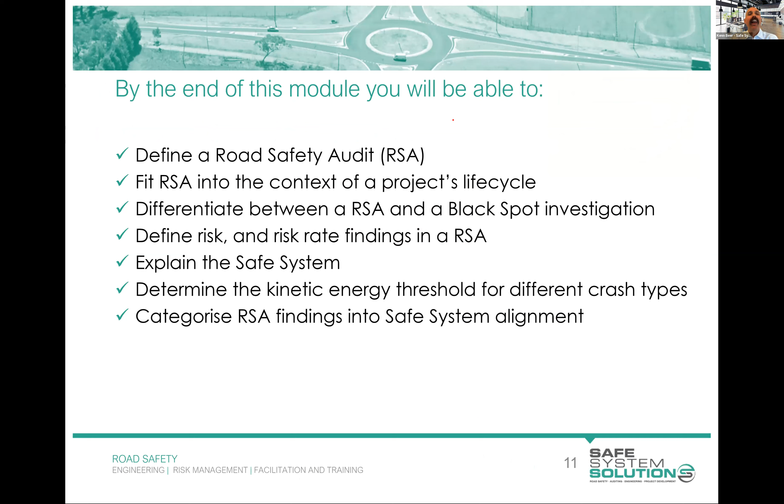We have a lot to cover, so I'm going to jump into it. But the first thing I want to say is that this course follows the Austroads Guide to Road Safety Part 6, Road Safety Audit, that one there. There was a recent release of a new version, the 2022 version, and I was technical advisor to Austroads on that one. We're running through the newest and latest content. Many of you might have seen past versions - they're all superseded, and we're running with that one.

The course overall, for all the different modules here, is about outlining the process. And I stress that this is the process of this thing called road safety audit. All of the technical intricacies that you might need to know as a road safety auditor, we can't cover in the time we have. Really, that is an ongoing learning for your whole career as an auditor or the like - you're continually picking up new things, new ideas. We want you, though, to have a basic skill set as a road safety auditor to understand a few of the common things that pop up in road safety audits and a few principles to think about from what presents risk on the road network.

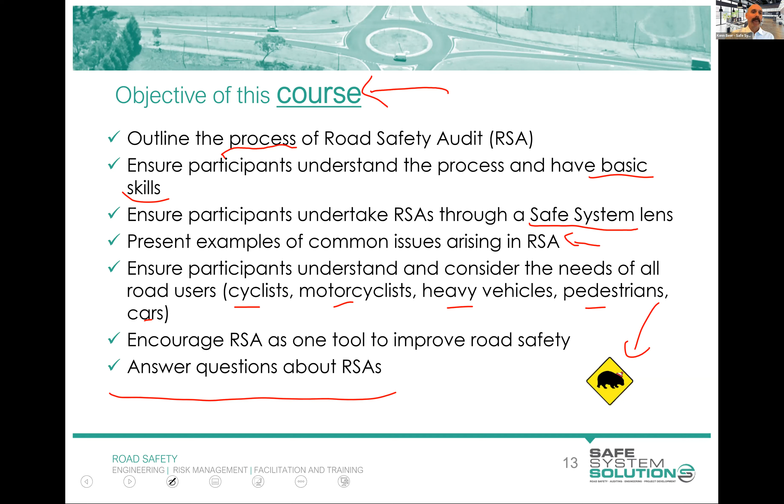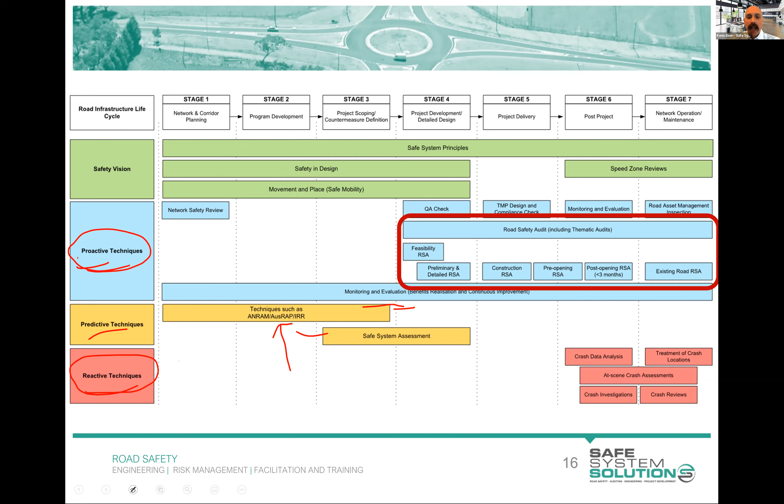But I'm going to keep picking on. I'm going to come straight in here and put up a common road safety audit misunderstanding. And I do that because a lot of people have heard of road safety auditing, okay, but don't necessarily know all the details. So people think that a road safety audit is checking a design or a bit of existing road for its conformance and compliance with the documented standards and guidelines. That is not the case. Okay, that may be part of your road safety audit, but that is not the driver of a road safety audit.

Now, I'm completely sympathetic with people making this mistake because the use of the word audit immediately conjures up that vision, doesn't it? If you're going to get a financial audit, well, they're going to check, have you done everything in accordance with that specific documented law or the like, okay? But road safety audits are different to that. And what road safety audits are is really a common sense check of what is being proposed to be built or what exists that could present death or serious injury.

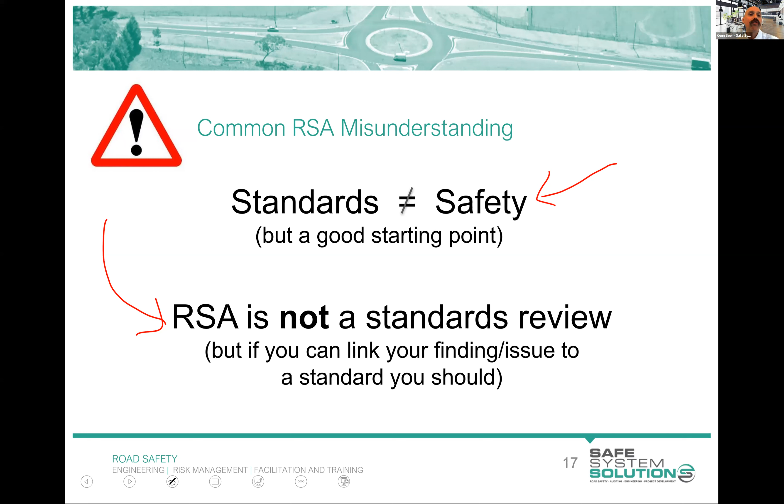It could be because there's inbuilt risk within that standard. It could be the inbuilt risk within that standard that in the context we're putting it is elevated or we believe is unacceptable. It may be that two standards connecting together cause a safety issue. And that's the kind of thing we're looking at. Now, that being said, standards and guidelines that we have documented often are a really great starting point. So we still do look at them and we like to know them as road safety auditors, but checking compliance with standards is not the driver of road safety audits.

In fact, I'll give a prize for the first person to put in the chat which road that is. I'm going to give it to Michael there for Eastern Toll Road. Eastlink is correct. It's very good spotting.

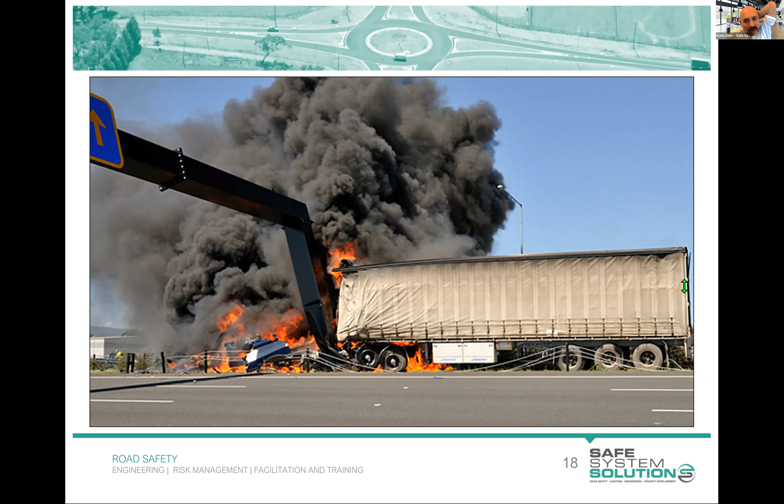Let's say that that's a test level 4 barrier system, the MASH test level 4 barrier system. Now, this is going to start to go above some people's heads, but don't worry about that at this stage. Does anybody know what weight of vehicle that barrier system would have been tested at, 15-degree angle, 90 km/h? Pop that into the chat and we'll see if somebody gets that. So it's a certain weight of vehicle that we would expect that barrier would contain.

I'm seeing some guesses in: 65 tonne, 36 tonne, 16.5 tonne. We're getting a nice range here. Nobody's quite got that. Sean has just got it with the 10 tonne. So under the new MASH system, the Manual for Assessing Safety Hardware, it's a 10 tonne vehicle. Now this vehicle is going to be well over 10 tonne, especially if it's carrying cargo.

So the thing we need to look at there is, at the time, that barrier system and its configuration met all standards. It did. It met all the standards and guidelines and everything we had at the time. And the thing is that we've had somebody die there, even though everything met all of its standards.

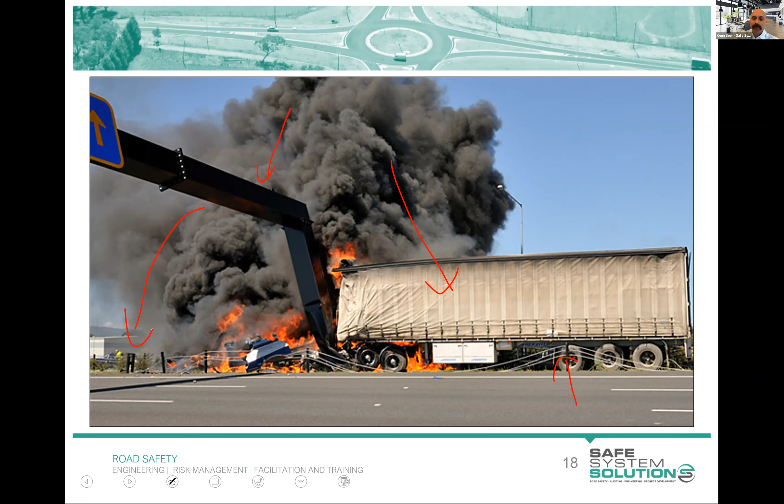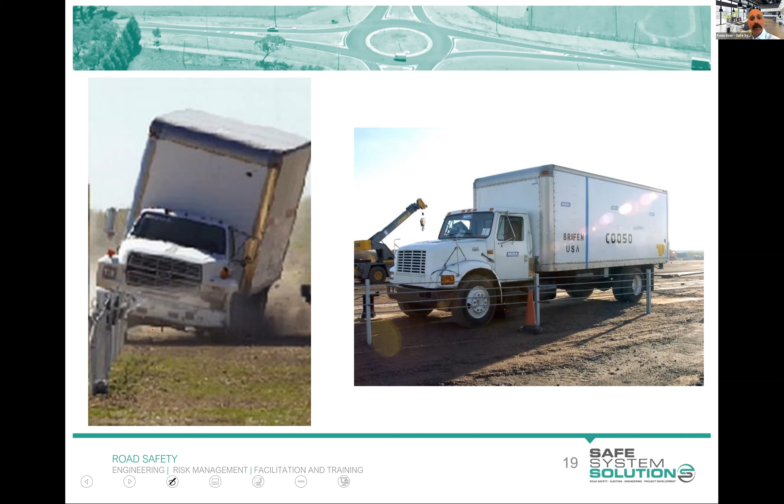So just for interest, that's the test level 4 vehicle, 10 tonne, and that's what we could expect that barrier system to contain in a particular configuration, angle, and the like. But anything bigger than that, we can't be sure it would contain it, and you can see there that it didn't.

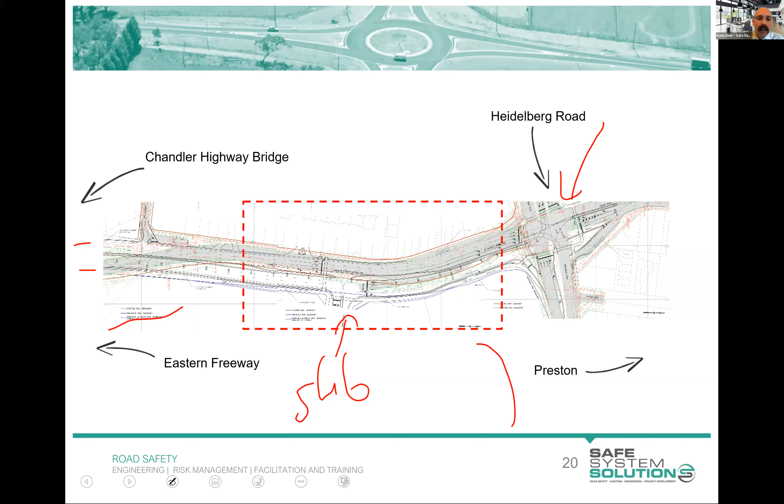Okay, we've got Chandler Highway Bridge down here. A lot of you probably know this area. This is Melbourne, for those not from Melbourne. And what we have is a massive subdivision down here. Huge lot of stuff going on. And then we've got a new access here. So let's zoom in on that access. Okay, and it's being signalized. We can see traffic signals are going there. You can tell by some of the line marking and this sort of highish level design. We can see there we've got a nice right turn lane there. And then I put a little red square as a car there.

Now somebody's driving along in a 60km/h speed zone, and maybe they're going a little bit faster than 60, 65 or something, ticking along, and they're going straight and, oh, we're in a turn lane. Now this is what we would call a trap lane. And to me, it's in there with some of the best naming of road issues we've got, because it is exactly that. You're happily driving along and you want to go straight, and then all of a sudden your lane traps you because it says, no, this is a turn lane now, and you've got to get out of that turn lane.

And we know, and you would logically know, that this area has a significant increase in sideswipe crashes and rear end crashes, because people recognize that and they try to get out, and there's cars braking and all sorts of things. This doesn't technically violate any standards or guidelines. Austroads discourages trap lanes. However, from just a complete look, have we not conformed with any standards? You can't say that that's the case.

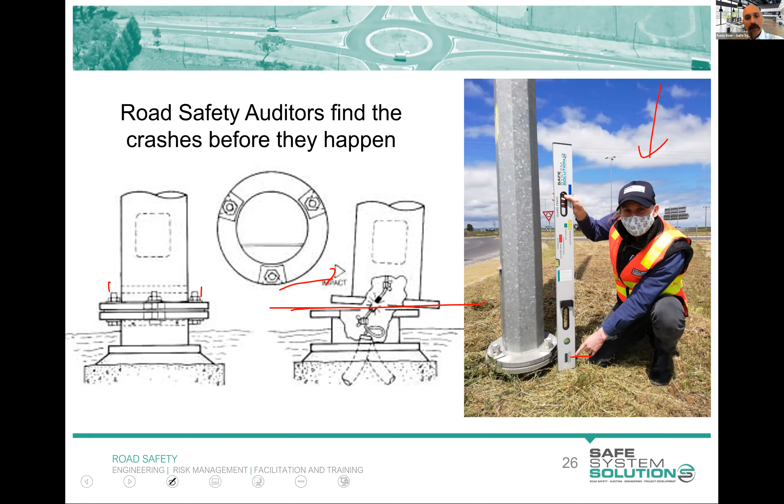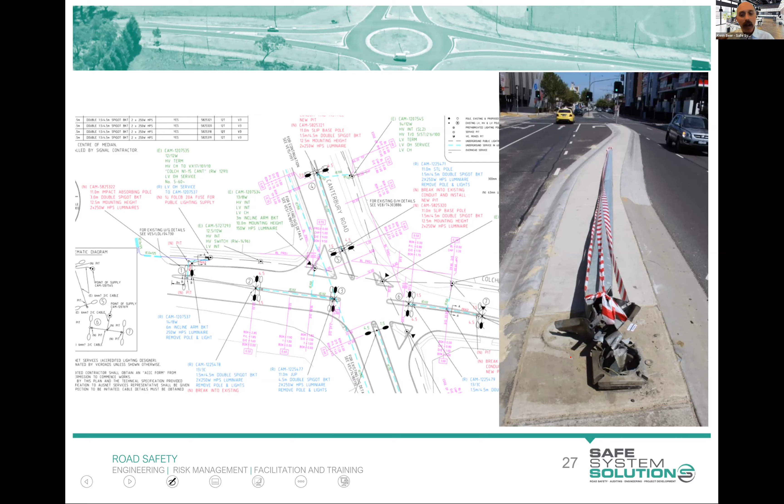Now, what if you looked at the design of this area before they built the upgrades around the Victoria Gardens area, and they'd said, we're going to do that as a slip-based pole because we're all about road safety and ensuring that the occupant of the vehicle doesn't stop abruptly and have all of that energy put into the human body. So they're saying we're going to use a slip-based pole. As a road safety auditor, would you have any thoughts around that? Any concerns? Anything that you might point out?

Okay, this group is great. Lots of good stuff there. I think Tim's going to get our prize there.

First one to sort of pop in there some concerns around where this will fall. Okay, so is it going to fall onto areas where pedestrians are? Now, not too many pedestrians in this photo, but there's a lot of pedestrians in this area often. So we've got to think about that. Is it going to fall onto pedestrians? Is it going to fall onto overhead power lines, onto tram lines and the like? So thinking beyond just that initial impact and how this is all going to happen.

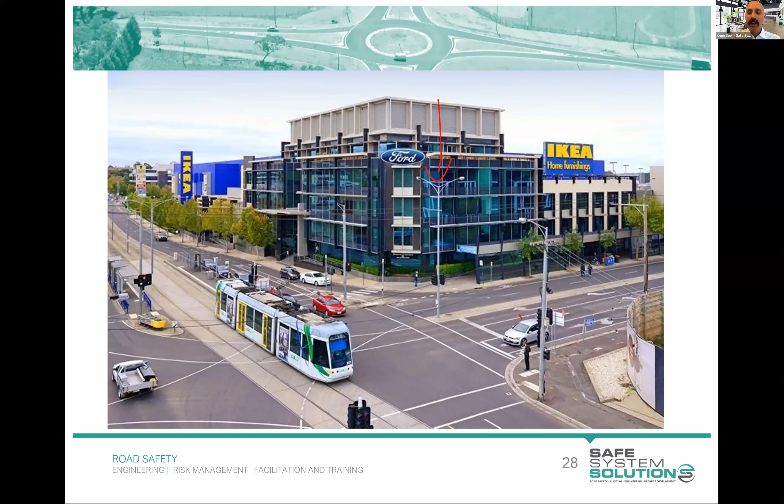Impact absorbing was what we would talk about, an impact absorbing pole. So it's similar principles, except it doesn't shear away. It takes the energy and it envelopes the vehicle within that. So it crushes, but it doesn't shear through. Now, why is this one interesting? Well, you contain the pole in a more enveloped area, so that's an important consideration in that.

But if the vehicle is going at high speed, it doesn't give us that ability for the vehicle to just continue on through. And so what we have is this sort of rule of thumb of high speed environments. You use the slip-base poles where they are going to shear away completely. And in lower speed environments, you either use impact absorbing like this one, if you're concerned about vehicle occupant safety, or you would just use a rigid pole that you know is not going to come down, as long as it's a low speed environment where the energy for the vehicle occupant is going to be low enough that it's not going to kill or seriously injure them.

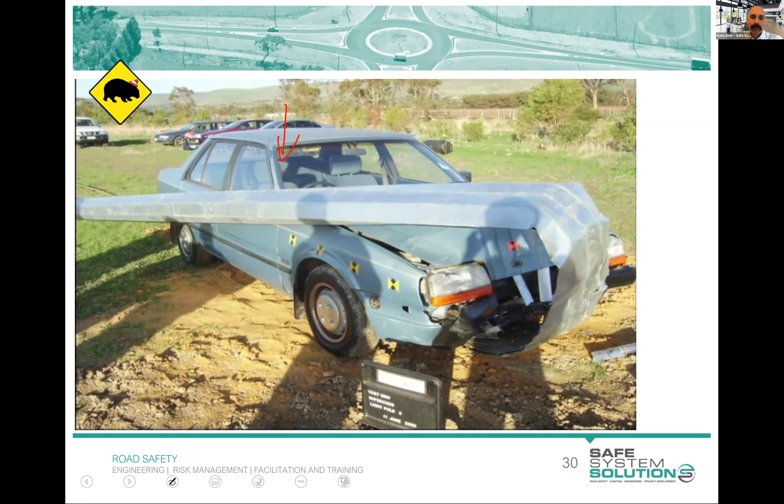And as road safety auditors, we are reviewing plans where they're making decisions about poles and thinking about all of this and weighing it up and deciding whether we believe that presents a risk to the community. So little common findings there in audits that you're concerned about where the slip-base will fall or the height of existing ones.

Now, throughout the slides, and you've got these PDFs in the learning management system, we often put little links to safe system snippets that we've done on this topic with a little bit more information. So when you download the PDFs, you can click on the hyperlink and it'll take you to a little bit more info on this topic. And those will be throughout the course.

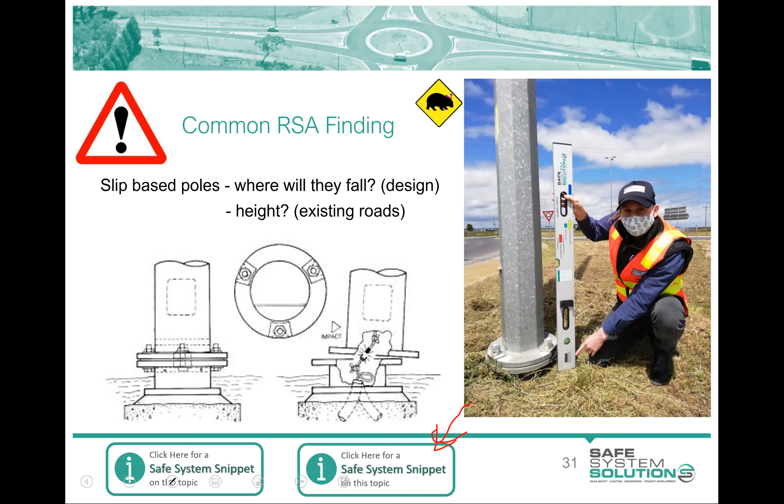Emma, a question that came up around the white ute video that we viewed not long ago, a question from Jamie has come through on the Q&A. What would you suggest to mitigate this see-through effect in this case? I know it's going back a little bit. It's a good question because it sort of leads into some discussion we'll get to around what we recommend as road safety auditors and how we go about recommending things.

Because there are lots of different ways to lessen that risk. And everything from, actually, okay, there is a see-through effect, but there's some very minor things that could be done, including advance warning and different things like that to try to lessen that, so we alert them to it.

There could be modifications to the geometry of the intersection, such as staggering it, where we actually change the alignment of the road slightly so it doesn't look straight down that road. We have the ability to use stockpiles of dirt and the like to block off see-through effects. We may want to move power poles, even very expensive, but in some situations that kind of thing can be

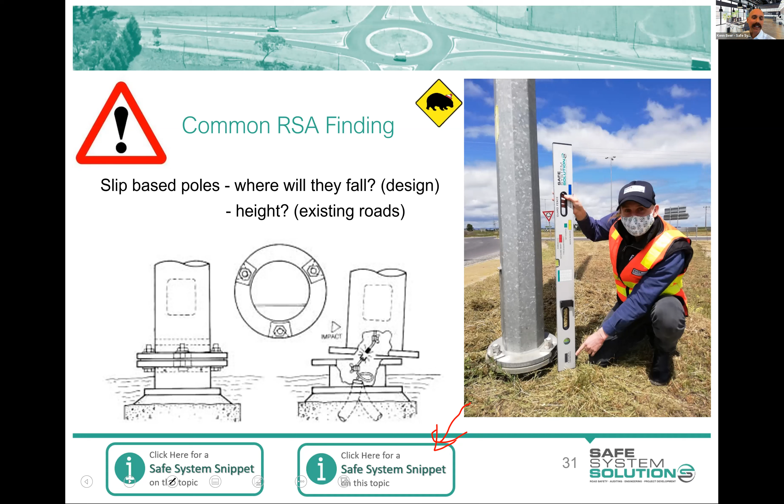done. If you get to these at design stage though, it's a lot easier. It's so much easier when they're lines on a bit of paper or in CAD, and you can start to alter those things. Once it's all built like that, it's existing, it's very expensive and hard to alter them.

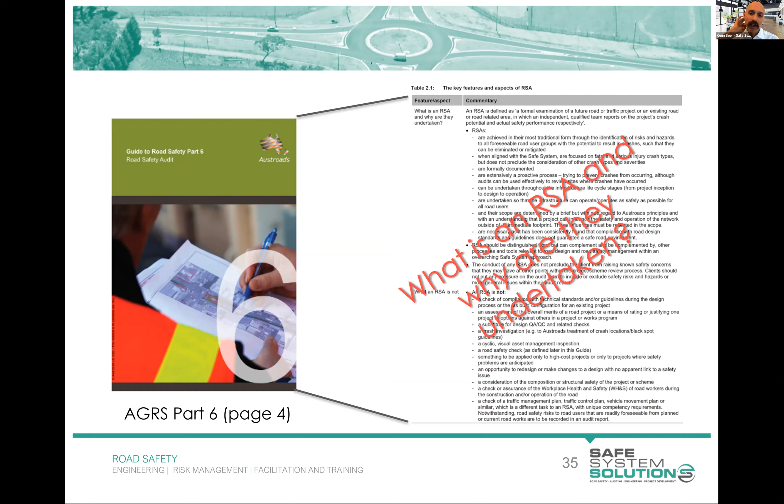But I do want to extract this little bit and mention it. Road safety audit is a formal examination of a future road or traffic project or an existing road or road-related area in which an independent qualified team reports on the project's crash potential and actual safety performance respectively.

Very important words in here. Road safety audits are a formal exercise, okay? It's not a quick check, not something you whip up at lunchtime. No, you go through 10 distinct steps now, okay? And that's a formal process.

By future roads, we're talking about designs for upgrades or new bus interchanges or anything that interacts with the road or road-related area. It can also be existing roads, so you can audit existing conditions. What's out there?

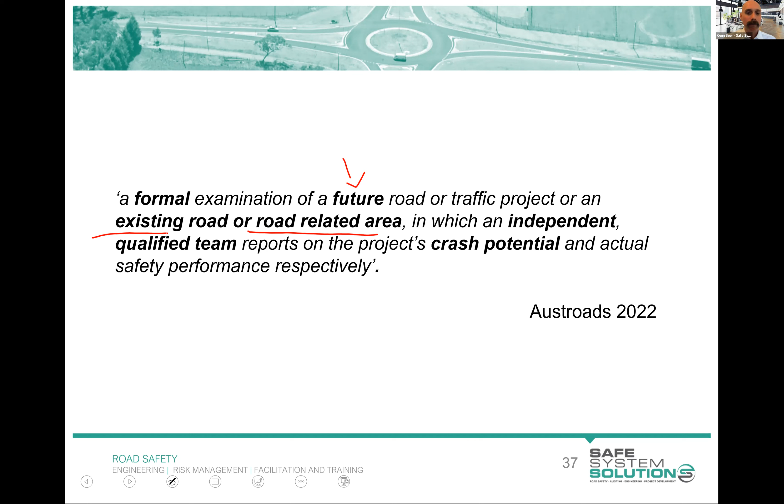Independent, super important, okay? You cannot undertake a road safety audit of your own design. You cannot undertake a road safety audit of a project that you're project manager of, okay? You must be independent of this.

Qualified teams. I will talk to you in our final module about what qualifies someone as a road safety auditor, the accreditation, registration across Australia, and who can do what. But we do need qualified teams. It's not just randomly picking people.

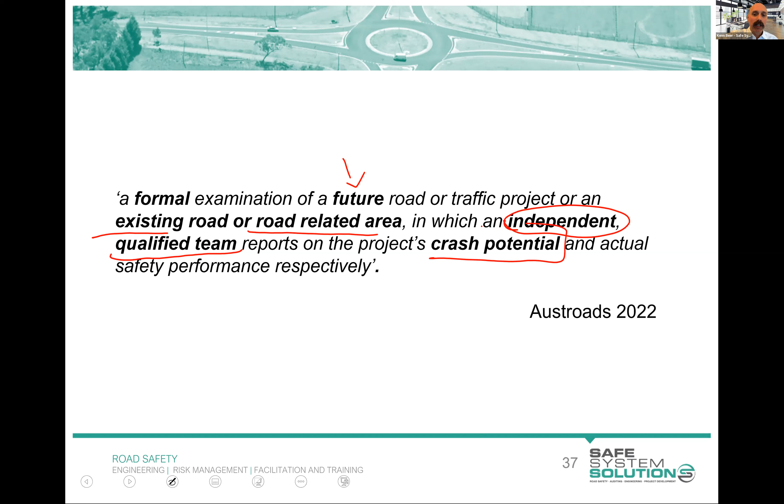And reporting on the project's crash potential. It's all about, what is the potential for crash?

So we operate under this thing called the SAFE system. Some of you have heard this a thousand times already, but I have to go through it once more for those who may not have seen it.

We need to ensure we are now undertaking road safety audits through this SAFE system lens. Now, the SAFE system, I could talk for many days, many years on it, but it has some key elements we need to think about as road safety auditors. It might be a little hard for you to see, but there's a principle in the middle of this SAFE system diagram. I picked this one out of the many I could have picked.

Human bodies are vulnerable. There's only a certain amount of force we can handle before we break. And we'll get into analysing that.

People make mistakes. So people make mistakes is a fundamental principle of the SAFE system. It says that people are going to make mistakes out there. We're going to do everything we can to lessen the amount of mistakes that are made, but we need to get our head in the space of trying to design the system to manage those mistakes. I talk about minimize mistakes, but manage mistakes. And what I mean by manage mistakes is try to think about the energy and the severity of the crashes.

So when we're auditing, we're thinking about trying to stop the crashes happening, absolutely. But then when they do happen, how do we make sure they're not so severe? And that links into our shared responsibility. We talked about that with the white ute, didn't we? Yes, there's some inappropriate things happening there, but that doesn't mean we can wash our hands as people responsible for the road, or designing the road, or making operational change. We can't do that. No, absolutely not. We take a responsibility there.

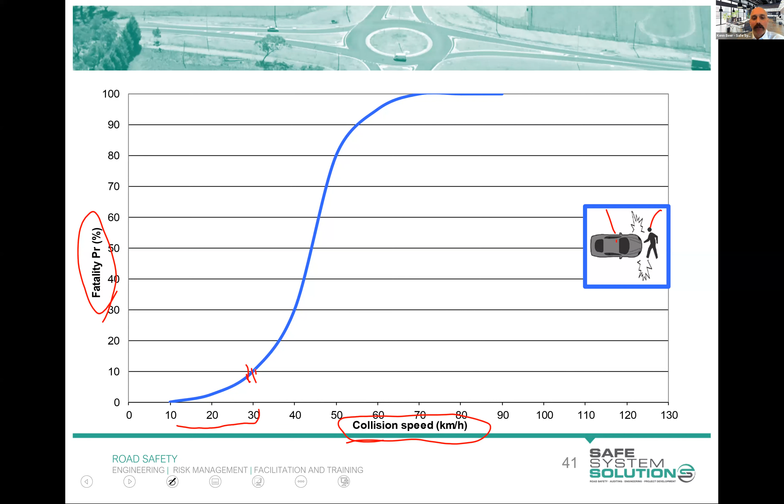So we actually have this information for different crash types within the population - we've got the chance that an incident will result in death at certain collision speeds. Now these are collision speeds, not speed limits. We see here for car hitting pedestrian, we're talking around 10, 20, 30 kilometers per hour is where it really starts to go really bad, really quick. That's a sort of exponential kick-up point.

There's the great man himself - comes in a little bit higher because this is a graph and a line for the population. We're going to have Usain Bolt-like people, we're going to also have our grandparents who are going to be much more frail and less able to withstand force, and then we're going to have weird, crazy incidents up here where people miraculously survive. But that's the general curve.

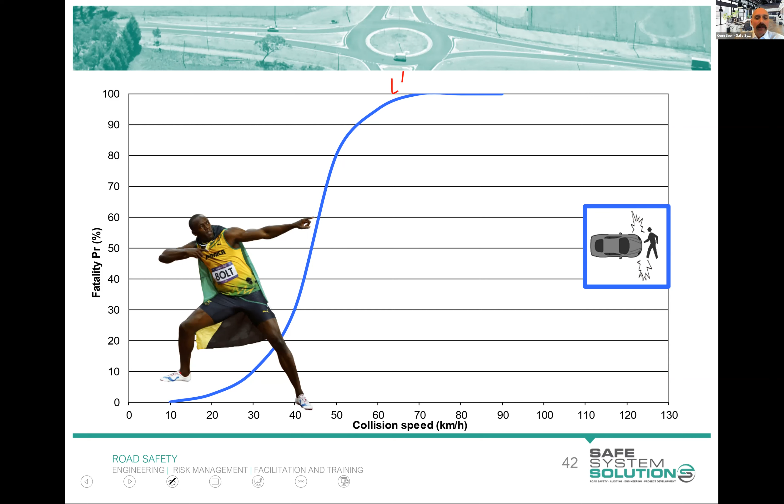This is what we're designed to withstand. He's okay - he broke a few ribs, came back, won the gold medal the next year. That's what we're designed for.

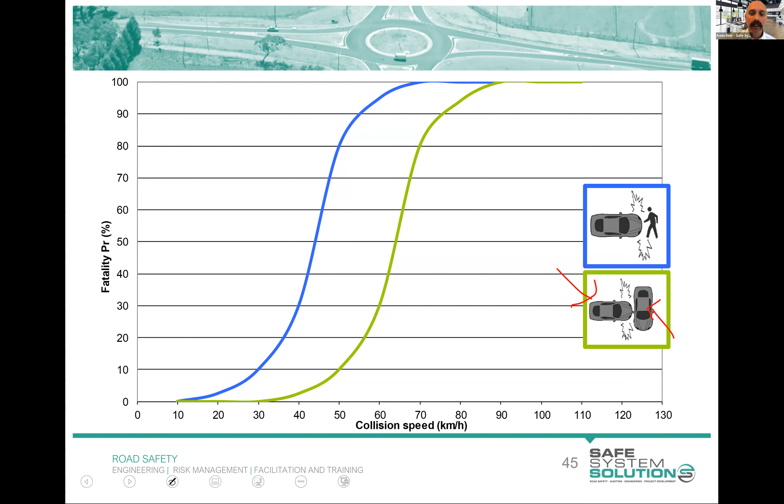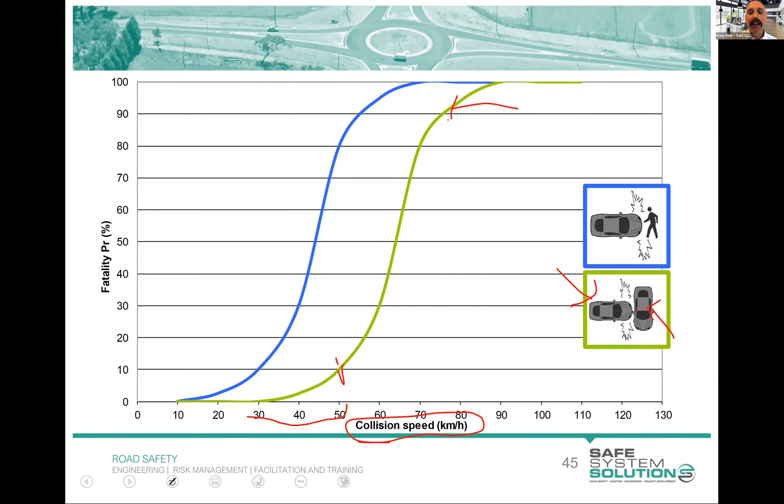But what about some other crash types? Okay, well what about a right angle crash? This is what we call the bullet vehicle, the one that does the damage, and this is the target vehicle. So bullet vehicle speed is what we're talking about when we say collision speed. We see bullet vehicle speed of 30, 40, or even around 50 kilometers per hour, direct right angle side impact into that vehicle - there's a decent chance of survival. Up around 80, 90, 100, there's not a good chance of survival for the occupant of the target vehicle being struck by a bullet vehicle at that speed.

Okay, so closing speed would be double that. The actual energy impact is the equivalent of that speed running into a brick wall - same speed, same mass, direct head-on crash, same as running into a brick wall at that speed, in terms of the force on the driver or passenger of each vehicle. If you were standing in the middle of it and got crushed, you'd double that. Or if it was like a little mini smart car and a massive B-double, and it came in and then went back, then you're doubling your energy.

But from that perspective, there's a Mythbusters episode that covers all that, if you want, in wonderful Mythbusters fashion, crashing cars into walls and into each other to actually prove that point. We've got some snippets down there.

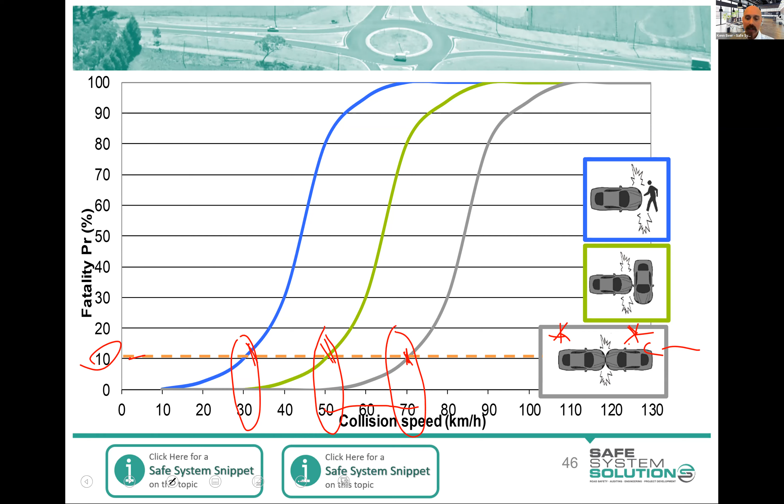But we sort of draw this line around this 10% level where things start to kick up exponentially, and those become really important speeds at different crash types, or crash types at different speeds. So we need to think about 30 kilometers an hour for pedestrians and cyclists, 50 kilometers per hour for side impact, 70 kilometers per hour for these head-on crashes, and think about a crash we're predicting - will it be above or below that? That becomes an important consideration. I've put some more crashes and these impact speed thresholds in there, and you need this sort of general consideration of severity.

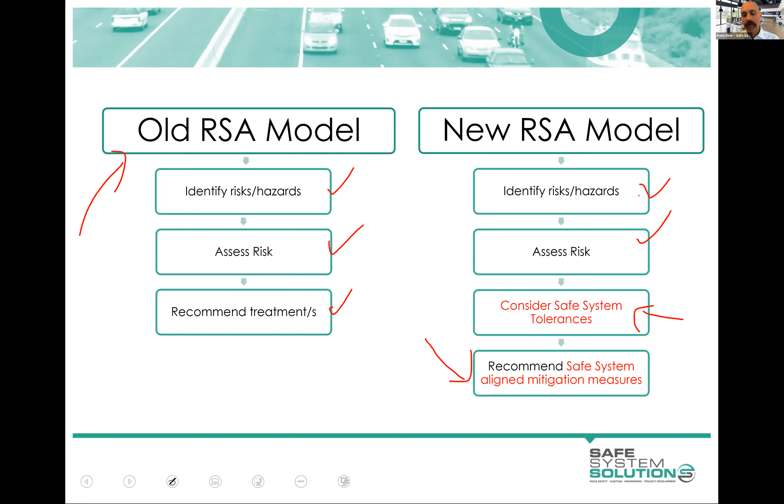I'm going to jump through this a bit quicker because I can cover that off in more detail later. The old road safety audit model used to be for us to just identify a hazard, do a risk assessment on that hazard, and recommend a treatment. We still do all of that, but now we identify the hazard, risk assess it, then think about that tolerance to the human body and those threshold speeds we just talked about. Then we make recommendations still, but we categorize those recommendations into how good they are in terms of safe system alignment.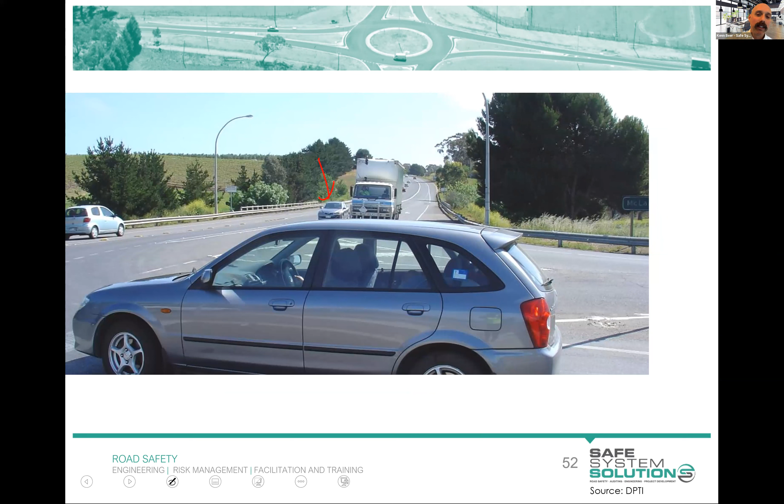Okay, this car's waiting to go. It's looking up the road. It can see that truck there, it can see the white car just next to it. It comes along and goes, oh beauty, I've got a nice clear run - as soon as that truck's turning left, as soon as that white car's continued past, I'm going to make my right turn. And then that silver car appears - the whole time it had just been hidden behind the truck. So people would call that masking, or officially dynamic visual obstruction. This is a dynamic visual obstruction because it's moving, it's not always there. And we see that just the configuration of that left turn lane has increased the chance that this will happen.

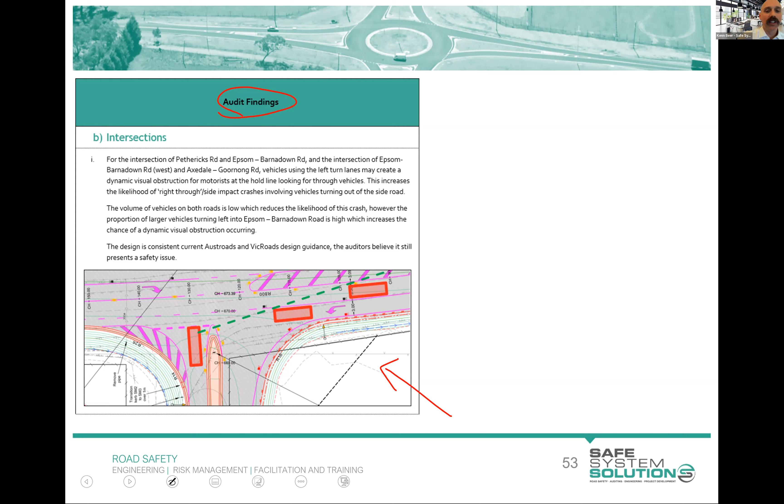Without even reading any of this, we know what the issue is. And I really encourage you to do that as road safety auditors. A snip of the design, if you can annotate it and really make it clear, because immediately we know where they're talking about, we know what the issue is, and it's very clear and helpful.

But in the words, we have a number of different things. And in my many years of auditing and teaching road safety auditing, I finally, probably about 5 or so years ago, came to the realization that I can actually make a formula of how to write a good road safety audit finding, or a recipe, as some people have now decided I should call it. But I'll break this down to some key elements to try to make it easier. And when you are writing road safety audit findings, we're going to be marking you on this. So make sure you include these elements.

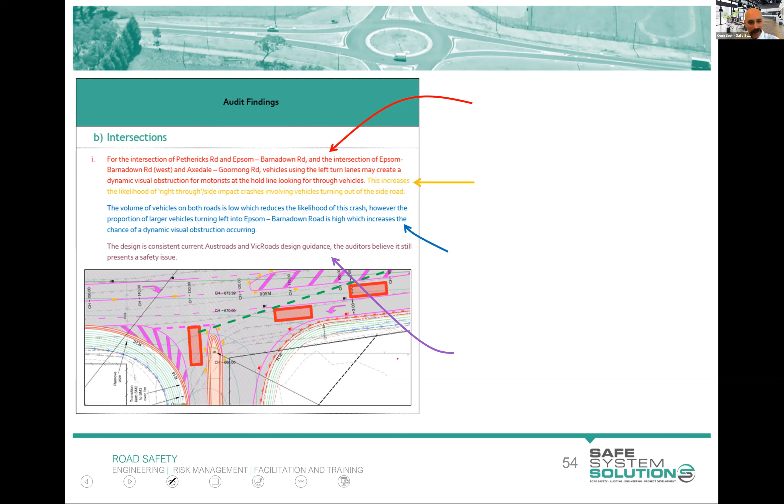The red there is the issue. For the intersection here, vehicles using the left turn lane may create a dynamic visual obstruction for motorists at the hold line looking for through vehicles. Okay, it's explained. The yellow says what crash is going to happen. This increases the likelihood of right through / side impact crashes involving vehicles turning out of the side road.

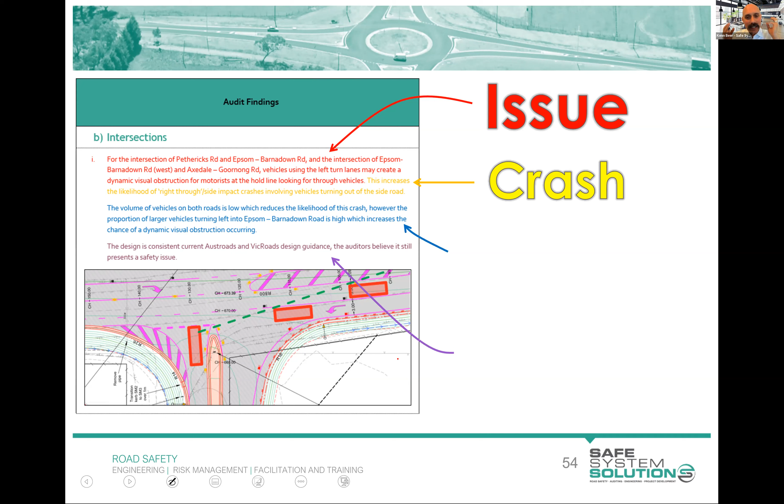Clearly stated a crash. Now, that's important to go in a road safety audit finding, because if you can't actually say a crash that's going to happen, it's not a road safety audit issue. Because this is about stopping crashes or preventing the injury within crashes. The blue then elaborates on any factors that are altering the risk there. So the volume of vehicles on the road is low, which reduces the likelihood of the crash. However, the proportion of large vehicles turning left into Epsom – Barnadown Road is high, which increases the chance of dynamic visual obstruction occurring. Okay, so it's dot pointing some things in there.

And then this final one says the design is consistent with current Austroads and VicRoads design guidance. The auditors believe it still presents a safety issue. So in this one, the auditors have said, hey, this technically meets standards. We still think it's an issue, and put it out there. Now, you don't need to put this purple bit. If it's something that clearly doesn't meet standards or guidelines, you'd certainly put that in because it's extra justification on why this is an issue. If it does meet standard guidelines and you're still worried about it, you may like to put a statement like that. You don't have to, but those are the elements.

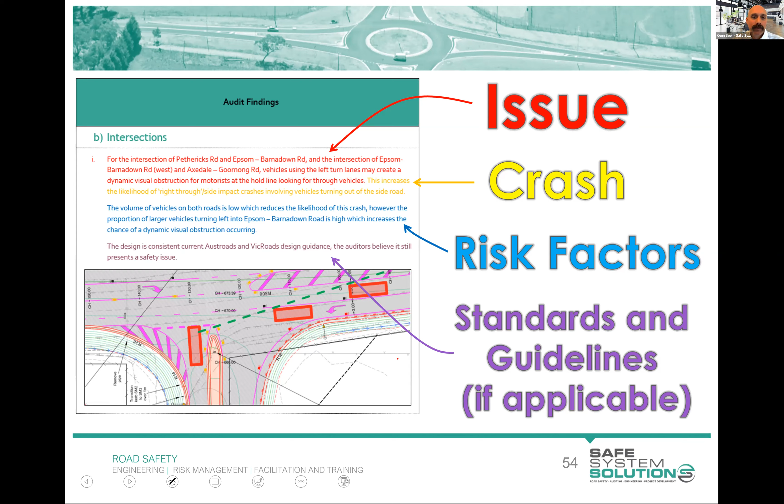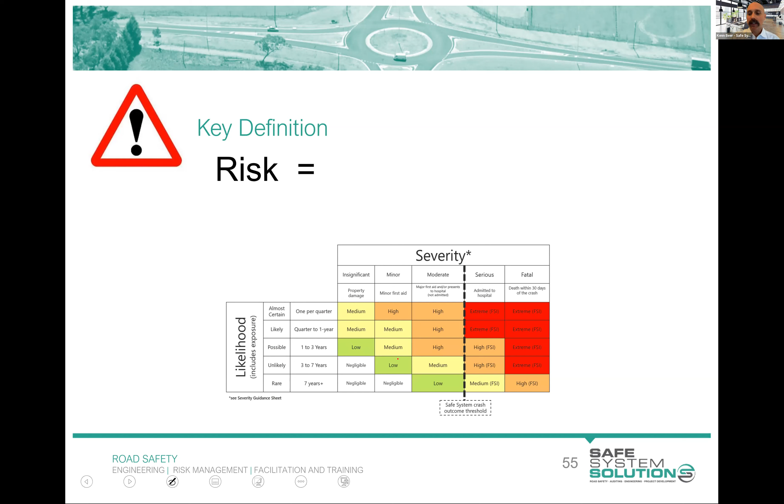Then you risk rate this. So we've clearly laid out this issue and we risk rate it. Now, risk equals likelihood times severity, or frequency times consequence. This is the international definition of risk. This is like financial risk, health risk, any type of risk. It's like, what is the chance of a bad thing happening? And then when it happens, what's the magnitude of badness? What's the severity of it?

And so, what's the risk of recession? Well, what's the chance we go into recession? And then how bad is this recession going to be when we go in? That's the risk of recession. What is the risk of a crash? Well, what's the chance that this crash happens? And then how bad is that going to be? And we do this then for each of the issues that we identify.

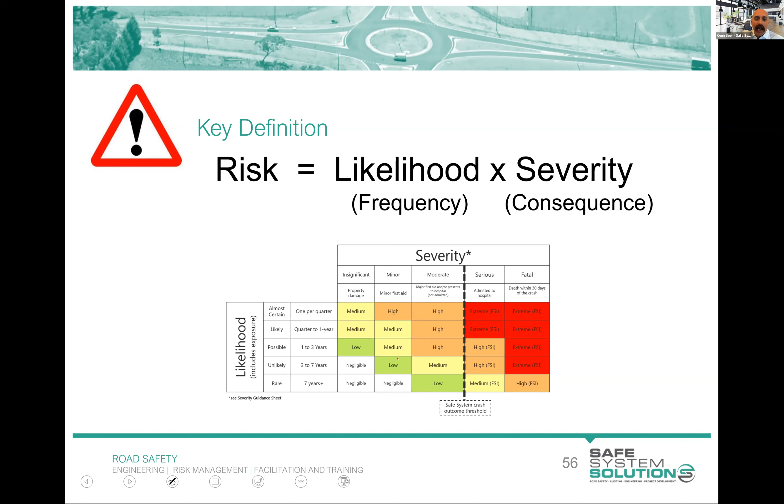Now, when I was coming up with this in the newest Austroads release, I spent a lot of time trying to think, how do we make this as useful and clear as possible? I came up with this diagram, working with the others. What we've got here is likelihood. This is the actual risk matrix now in Austroads, and it's the new one. So use this one. So this is the chance that the crash happens.

Now, any of you that do safe system assessments, you'll know exposure is another thing, with exposure within likelihood in road safety. We've got almost certain, likely, possible, unlikely, rare. But what does that actually mean? Well, we've given you some time frames where you'd expect those crashes. So as a result of that dynamic visual obstruction that we were looking at, if you believe that that is going to cause a crash every quarter, you would say almost certain. If you say, well, it's an issue, but it's really not going to happen, maybe once every 10 years or something, then you're saying it's rare.

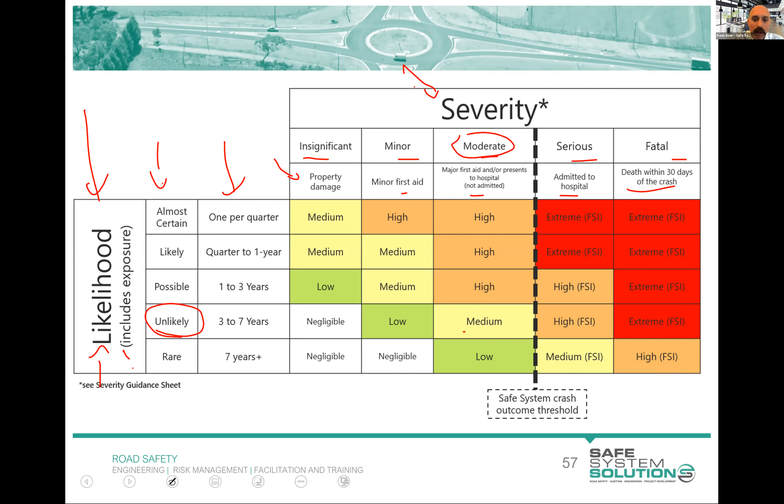Okay, but then when the crash happens, what's the severity of it? Insignificant, minor, serious, fatal, moderate? And what we've done is we've put in some information around property damage, minor first aid, major first aid, admitted to hospital, death within 30 days of the crash, to one occupant of the vehicle or one person involved in the crash. So to get to your risk, you say, all right, well, I think it's going to be unlikely and moderate. Well, that's a medium risk.

But what's this line here? What's this dotted line here? Well, under the safe system, we're trying to get rid of fatal and serious crashes. That's our aspiration. We know that we're still going to have mistakes and minor things happen on the road network. We don't want them, but anything to the right of the line we're very concerned about. Anything to the left of the line we're just concerned about. So you'll see that you've got high with an FSI and you've got high without the FSI. So that dotted line is there.

So if we go back to this, then we might say for this one, we think it's rare, because we said low volume, just low chance that it's going to happen. We think it's going to be serious when it does happen. The resulting risk is medium, and it's FSI because it's within that serious category. And then, so we've established now the issue, we've established a risk rating for it, and now we want to make some recommendations.

And we want to categorize these recommendations into either a primary safe system recommendation or a supporting safe system recommendation. A primary recommendation actually doesn't mean your number one recommendation, as the wording would imply, because you might have many primaries, because it's about how well they align with safe system principles. And you'll see here, road planning, design and management considerations that virtually eliminate the potential for fatal and serious injury crashes occurring associated with a foreseeable crash type. Supporting are anything that improves the overall level of safety associated with a foreseeable crash type, but are not expected to virtually eliminate the potential for fatal and serious injury crashes occurring. And then this little other bit: doesn't change the ability for us to put a primary treatment in the future.

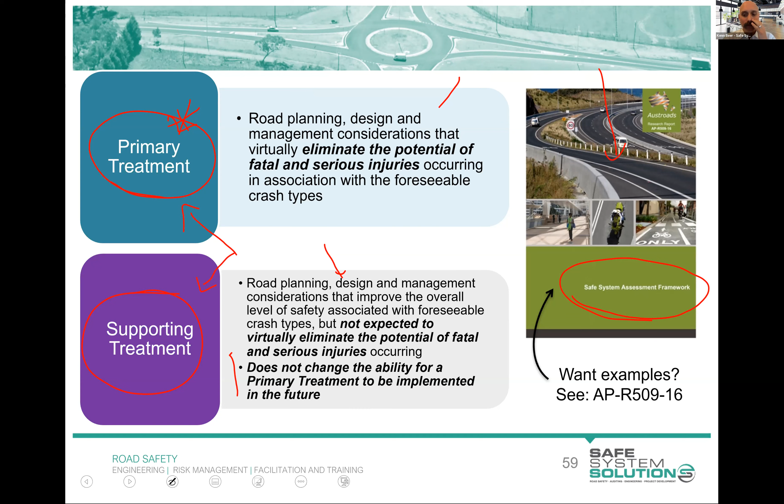And I'll come to questions in a second. I just want to get past this final bit and then we'll answer those.

So you then make a recommendation or recommendations as road safety auditors. This one says, implement measures to reduce the speed and/or angle of impact at this location. This could be achieved with a roundabout, P, primary. If this cannot be achieved, implement measures to improve sight lines at this location, such as increasing the offset of the left turn lane, relocating the hold line forward, provided that it can be done safely. Supporting.

Okay. So on this, you can just have one recommendation, but sometimes that can cause a little bit of an issue. For example, this one, we'd love a roundabout here, okay? And maybe it's at an early stage in the project enough that they're still thinking about options and, oh, should we go for this? Should we go for that? And that may help. But maybe they're so far progressed in this job that they're locked in with the budget and the specifics of it are so locked in that the roundabout is a ridiculous idea to whoever's receiving this, in the sense that they just go, we can't do that, right? Well, what else can be done to lessen the risk? And so we've given some other options there. And that's, to me, being realistic as an auditor.

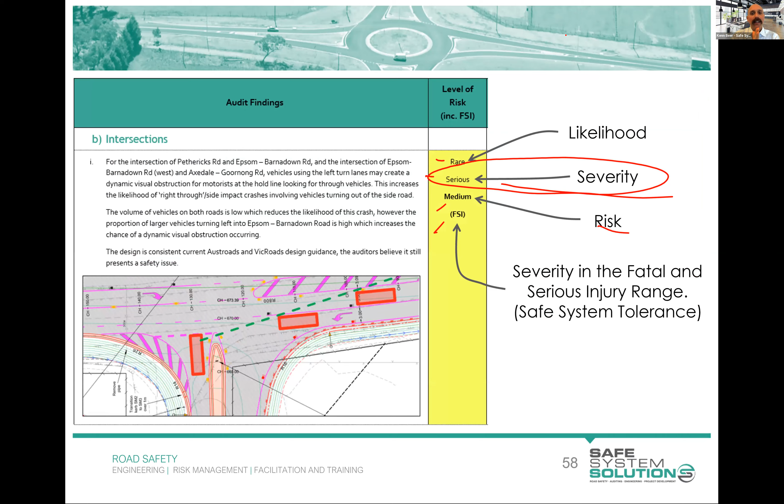FSI is fatal and serious injury. Sorry, I should have said that. FSI is fatal and serious injury, and it was to the right of the dotted line in our risk matrix. That covers off the fatal and serious injury there. Oh, looks like people are already helping out. Yeah, it's great to see everyone helping each other out.

And one question at the bottom is, if presenting options, would it help to provide the level of risk for various options? That's sort of next level thinking, because we've just finished a project for the Asian Development Bank, working in collaboration with iRAP in doing exactly that with star rating and risk rating of different options within road safety audits, called star rating for road safety audit. Not something we're going to include in this course.

The way it happens in practice usually, though, is that we will present these and then have discussions with the client. And it's a bit more collaborative at that end of the audit. But if you can articulate quite clearly in your recommendations which is the better risk reduction and which is the lesser risk reduction, that's very helpful.

And what may also happen is that the client, whoever receives this audit, may ask you for particular advice or to provide some commentary around which is best and what sort of reductions you might be expecting. And that might be something that you could provide an extra memo on. But happy to show people the way you could do it in a more formalized manner. It's not something that's done in Australia yet, but I think it could be a really valuable approach.

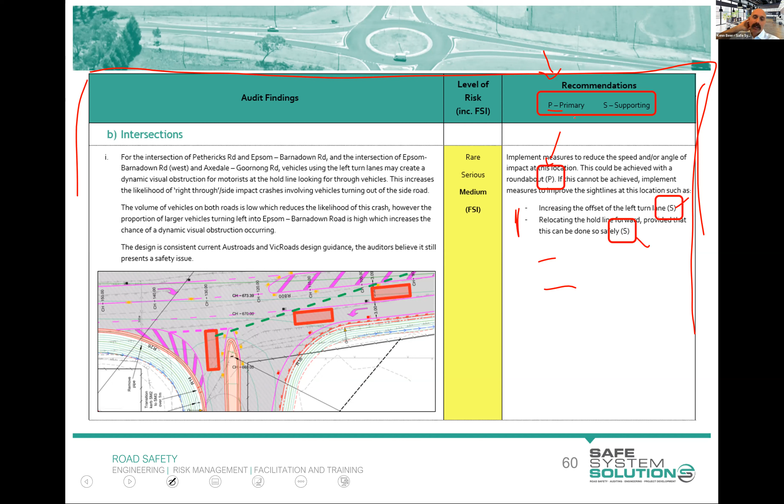I better keep moving on, Emma, to give you a bit of time to introduce the exercise. I just happened to be having a chat with Jamie, and Bob and Jamie were talking about something, and I thought, I talk about that in the road safety audit course, I should put a little diagram of that. A similar issue came up on a design, and even within the road safety audit, we went a little bit above and beyond what you'd usually do and sketched up how it could look by utilizing a bike lane to open up the sight lines there.

And that actually helped in multiple concerns we had in the design, because one was that dynamic visual obstruction, but another was the number of bike riders we saw while we were out there as an audit team, which was a little bit more surprising to us. And they were not really going to have any separation going through that intersection. So the bike lane opens up sight lines for a vehicle that's stopped here, and also gives the riders a bit of space between the left-turning vehicle and the straight vehicle.

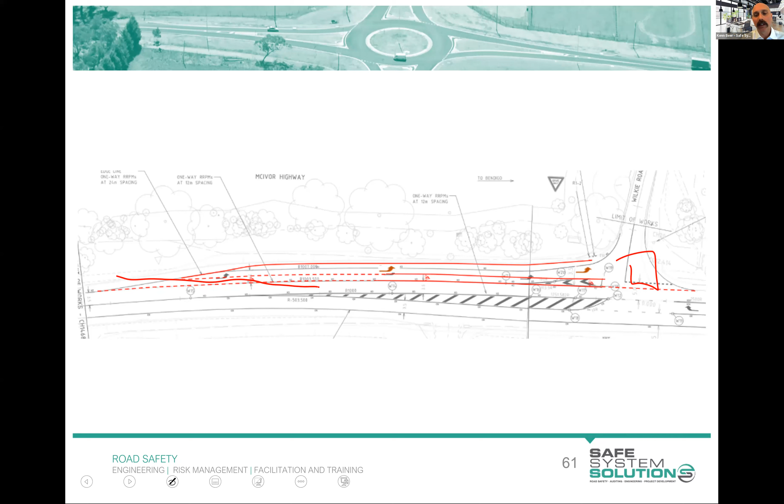Little tip there. So to be a primary safe system treatment, it's really going to have to address the consequences of the crash, the severity, or it's going to have to virtually eliminate the possibility of the crash happening, which has to take into account human error. So people falling asleep or running a red light or these sorts of things. So you'll get some practice at working on what's primary and what's supporting, and have a look at that Austroads Safe System Assessment document, which we've put into your resources.

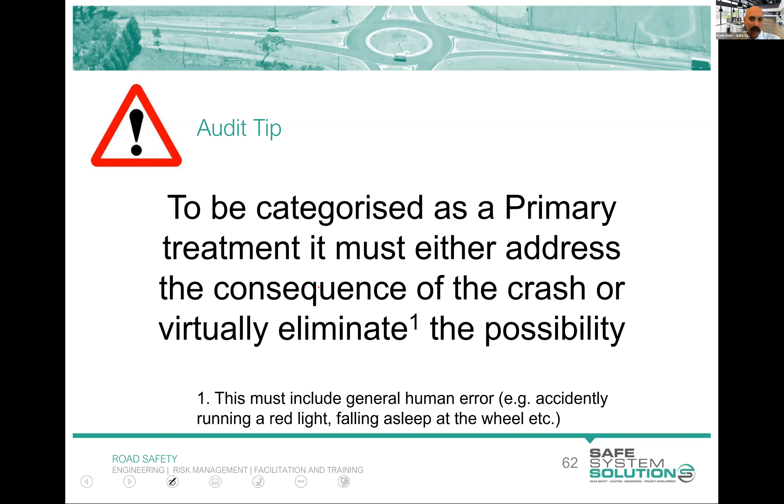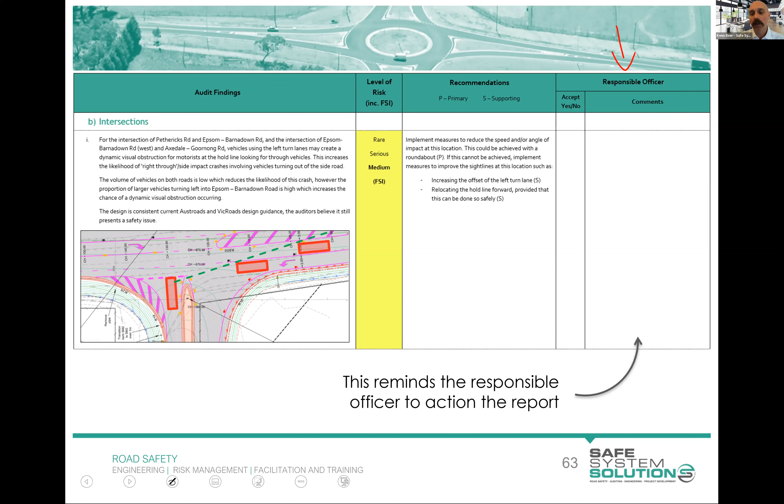Last thing I want to say is in the full table that you provide, this area you leave blank, and responsible officer, which is whoever gets the report, and it is just a reminder: hey, do something with this, right? Respond to it. You don't need to accept what we're saying. Just make a comment as to, yep, I accept that, going to do something about that. Or no, we disagree completely for these reasons. That's all fine. But we as auditors, we leave a blank column there.

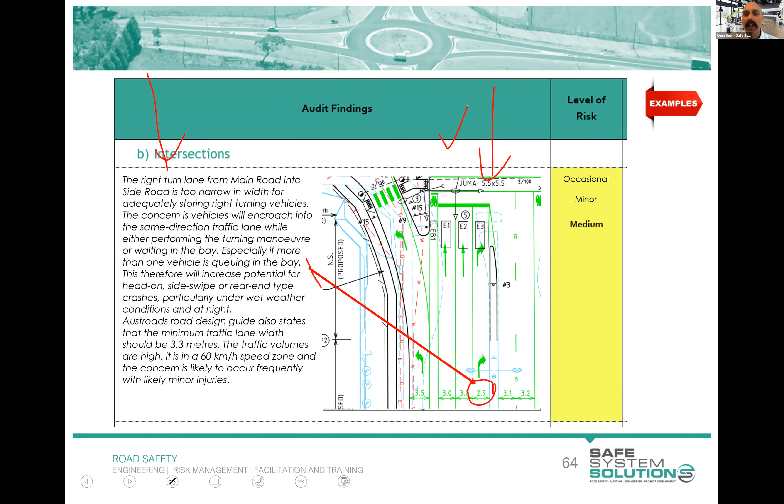Fair enough. Okay, so we don't even need to read all this because this has done a beautiful job, but there's lots of good stuff in there. You can see the risk ratings in there. And then thinking about the tolerance to physical force. And sorry, I'm jumping through quickly here. The 2.9 meter wide lane... hurrying through to catch up on a little bit of time here.

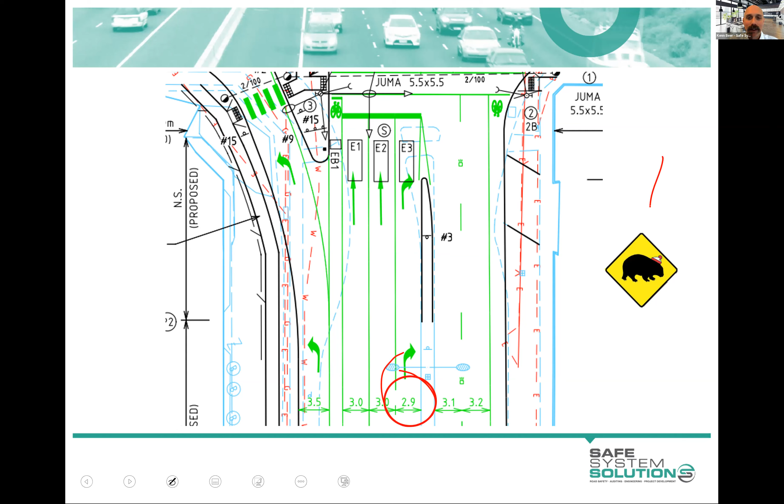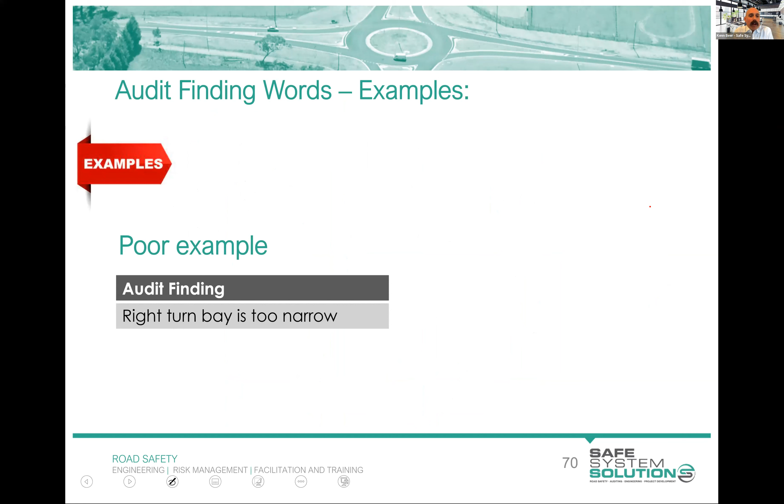So in terms of wording these, go back to that formula, because a poor example of an audit finding, the wording, would be to say something like, right turn bay is too narrow, without a snip or anything like that. I mean, I get that. I'd go, which right turn bay? And what's the issue? There's so many questions to ask there. What would be better is, right turn bay from main road to side road. It increases the chance of sideswipe or rear end crashes, and Austroads wants a 3.3 meter minimum. So we've got some more flesh on the bone there.

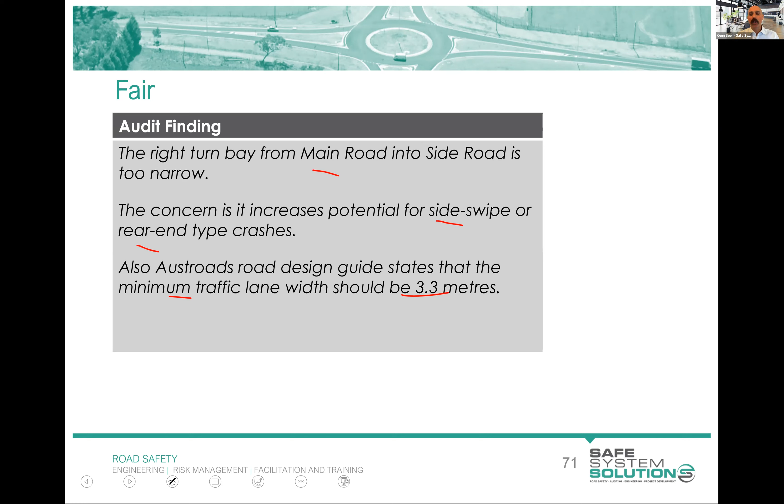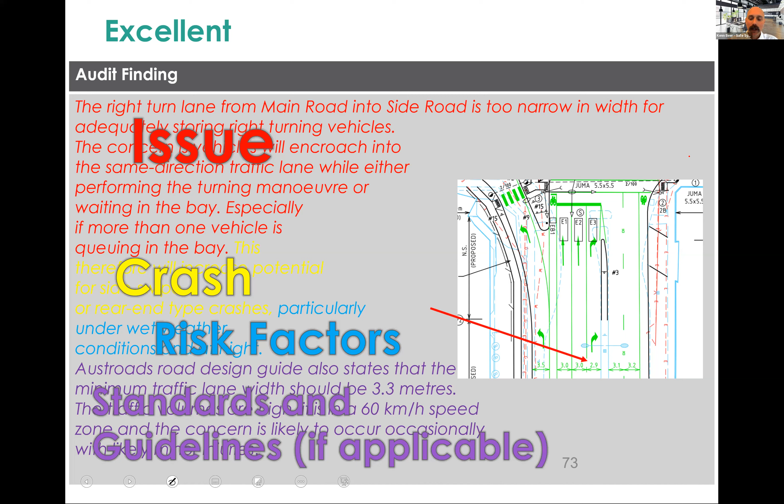But the gold standard here has the snip, so we know what's going on. And it's got all of these words, which we could then break down into their specific elements, which is the issue, the crash that could happen, the risk factors, and standards and guidelines, if applicable. So try and get back to that formula.

Okay. Road safety audits. Here's just a few things that they are not. Not a check of compliance with standards. It's also not an assessment of the overall merits of a project. That becomes quite important. You're just there to identify issues with that project. That can be a hampering element of a road safety audit, that it is just pointing out issues. It's not saying this is a wonderful road safety project that's going to save many lives. No, what it's saying is that we're concerned with this specific aspect of it. So it doesn't quite do that.

Safe system assessments, on the other hand, are a wonderful tool for showing the value of a project. A road safety audit is a different exercise, not a means for justifying one project option against another. We don't use road safety audits to rank project options. It's not a substitute for a quality assurance process. It's not a crash investigation, and it's not the usual sort of asset check, visual inspection. And there's a number of other things in there. I'm not going to read through all of that.

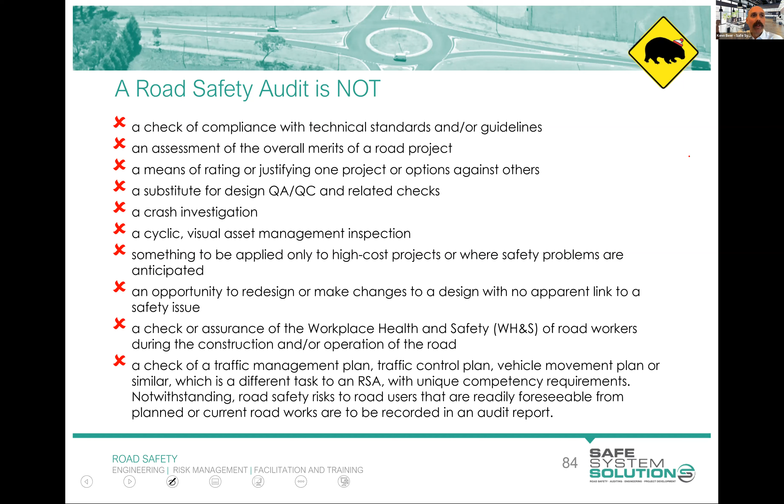It's not a workplace health and safety check as well. So that's one where there can be a bit of thinking about people wearing the right high-vis vest. Are they doing the right sort of behaviours? That's not really, in terms of their health and safety, our concern as road safety auditors. You might certainly point that out to them because safety is front of mind for us, but we're really thinking about the road, the signs, the lines, the road users, and the safety of the workers in terms of what the vehicles and the public could do to those workers.

Now, a road safety auditor is a problem finder. And I find that new auditors find it really hard to just find problems. Not because they can't find the problems, but because they solve them immediately. And what we see are people coming up with audit findings like, the intersection should be a roundabout. Okay. And that's not an audit finding. That's like a potential solution to some problem that you haven't actually laid out for us. And technically, auditors don't need to help solve problems. Okay, that's just how our industry has evolved.

And we help with all of these recommendations to try to inject the best road safety outcomes in. Our job is just to find issues. In fact, New South Wales, they don't even let their auditors write any recommendations. Just find us all the problems. We'll solve them. Don't you worry about that.

Now, the rest of the country and New Zealand will want the auditors to have a bit of a say in how the risk could be lessened. But just really finding problems is what we're out to do.

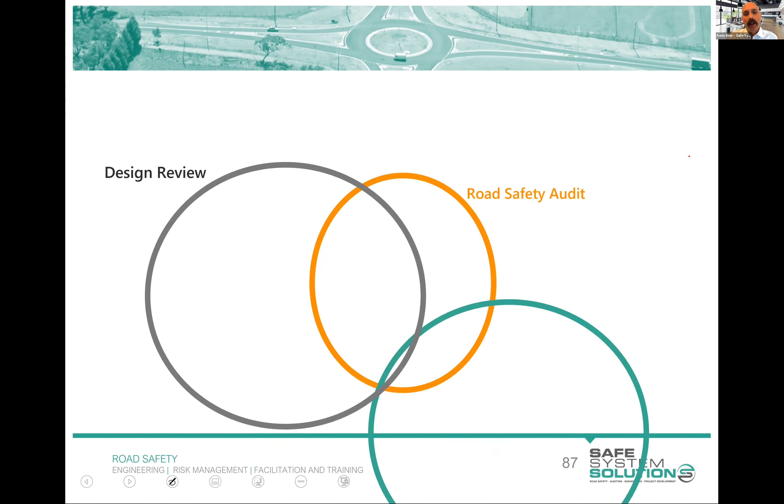And there's overlap between a lot of these techniques. We've got audits, we've got design reviews, we've got safe system assessments, we've got safety in design, which is, can it be built safely? Can it be managed safely? Can it be decommissioned safely?

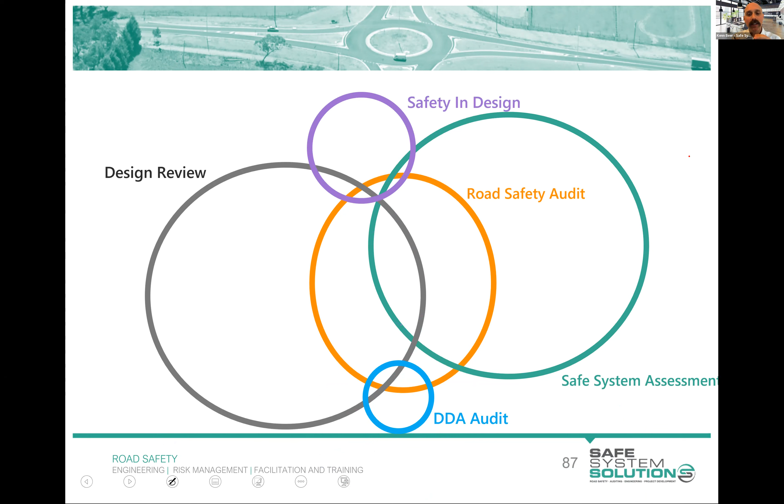And we've got DDA, Disability Discrimination Act, can all road users of all abilities use this, people in wheelchairs, vision impaired, and the like. There's a lot of overlap between these things. Each have their own use and cover different things. But I just want you to be aware they're all different beasts.

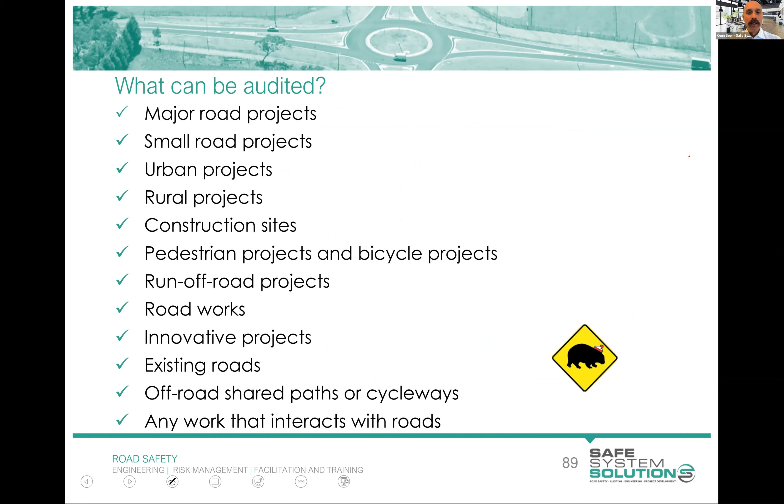Okay, what can we audit? So what can have a road safety audit done on? Well, pretty much anything that interacts with the road. Big projects, small projects, innovative projects, even things like off-road shared paths, cycleways, they can be subject to road safety audits as well. So really useful across a whole lot of different things.

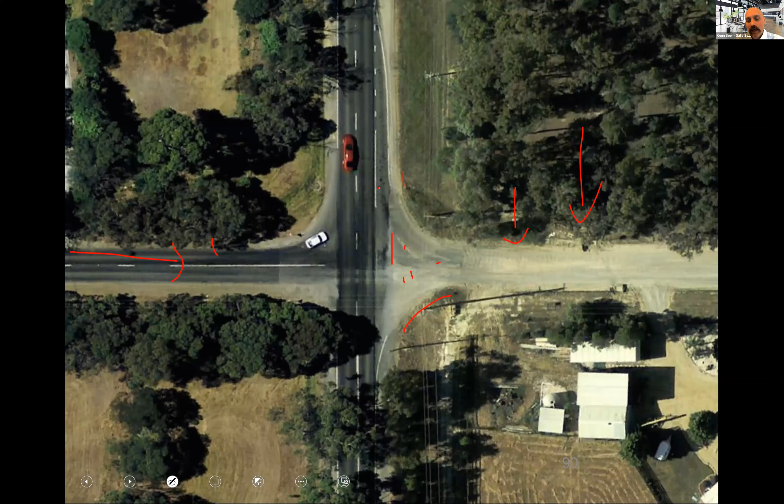Now, the really tragic part of this one was they did this work, the council, and they didn't do a road safety audit because they said, we are upgrading the road. I mean, this was their justification. We're upgrading the road. We're improving things, and we're following all of our standards and guidelines. We're just making things better here.

Well, people who were killed and seriously injured at this intersection would disagree that it's better. And there was quite a significant increase in death and serious injury. There were other contributing factors probably as well, which was increased traffic and increased speed, and some of you pointed this out as well, but certainly we did see a large increase in overshoot, death and serious injury in that way. That's an example. That independent set of eyes, really important.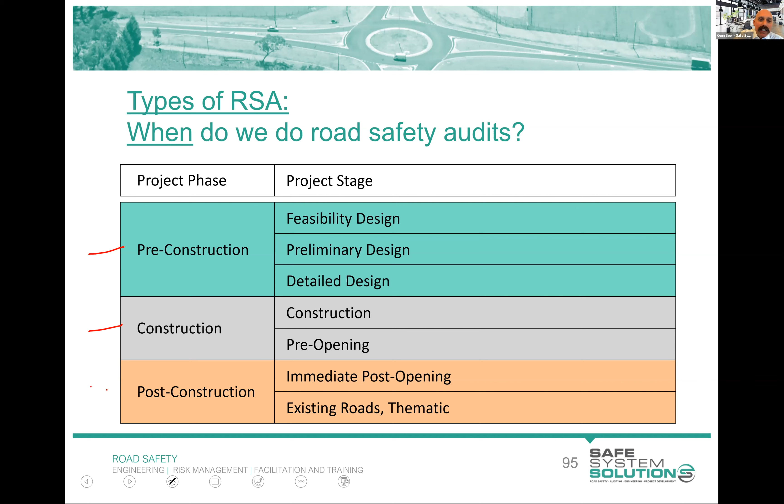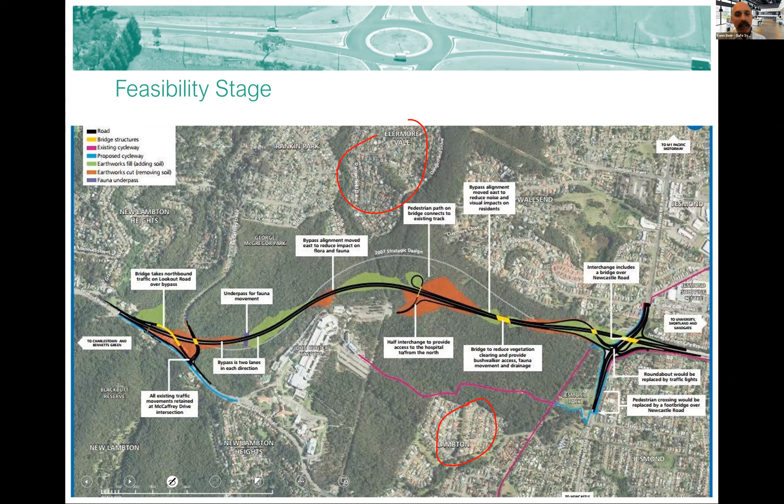So just finally, we have different types of road safety audit, okay? And they are done at different stages: before anything's built, during the building process, after it's been built. The feasibility stage, I call them the planning audit sometimes, very high level, where are the interchanges going to be? How are people from up here going to get down here? Is this the right intersection or interchange form?

That sort of stuff. You might get a bit more detail thinking about where breaks are going to be and the like. Feasibility is early. We then get into the preliminary and concept stage, and we get a bit more meat on it. We're starting to see where lanes are.

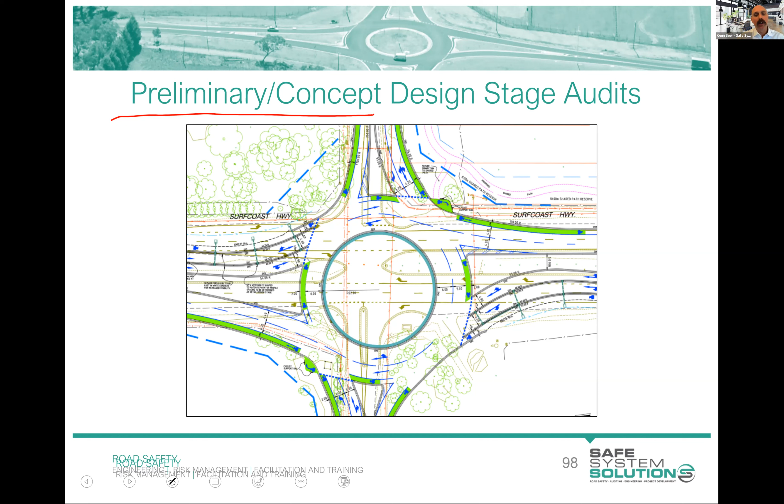We're starting to see bike facilities, how it all fits in. It may be on a survey base like this, or it may be on an aerial image, more likely on an aerial image, but you're starting to get a bit more detail. Then you get into the detailed design.

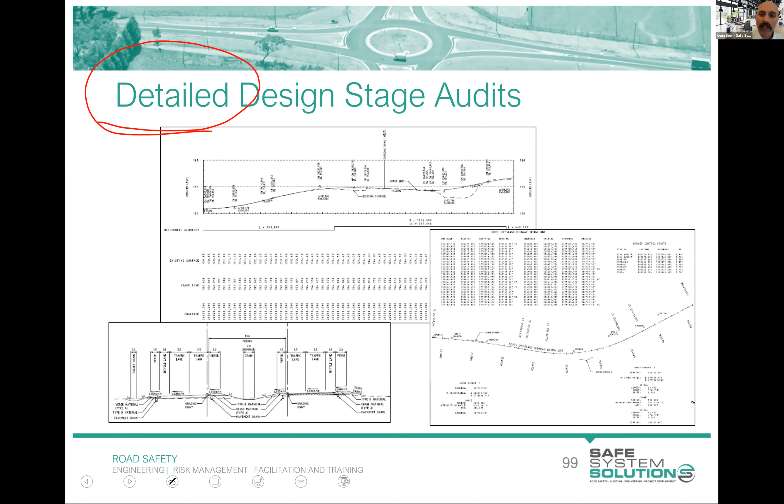And this is where you get the works. You get the long sections, the cross sections. You get the line marking plan, signage plan, signal phasing, pavement, drainage. You get it all, and you've got to work through all of that looking for these issues before they're built.

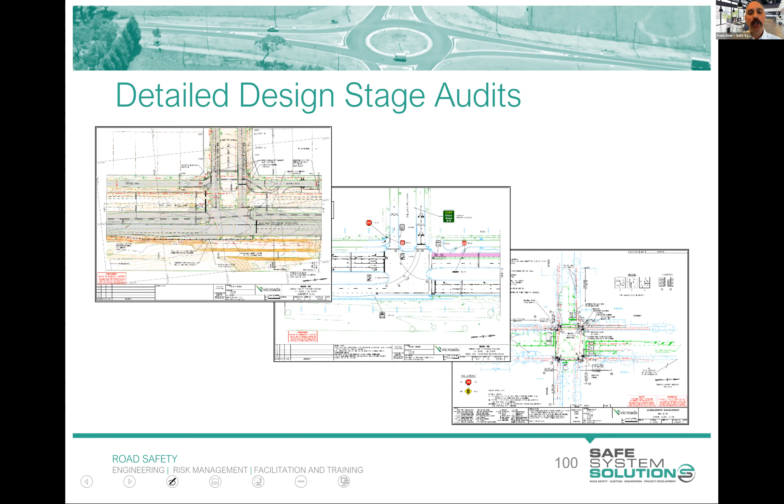I'm going to jump past a couple of those. Construction is doing the same process, looking for issues about what they're planning to do in terms of all of those temporary signage things.

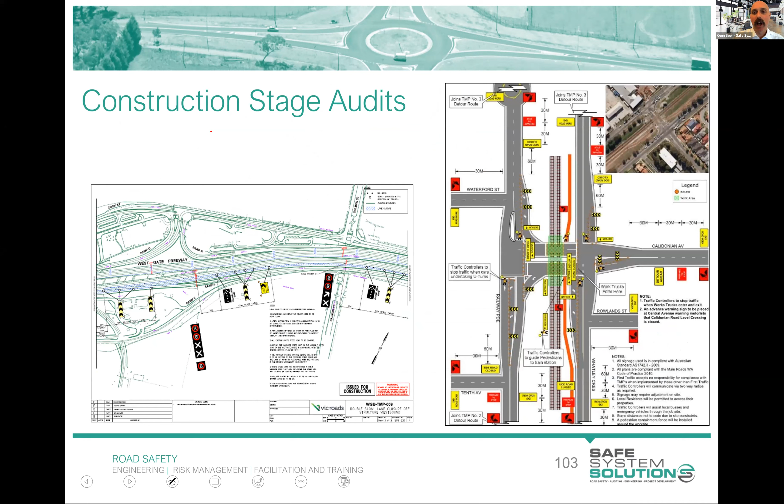Pre-opening is after, just before they cut the ribbon. Did they get the RRPMs right? Did they get the line marking right, barriers the right height, overlaps of the barriers right?

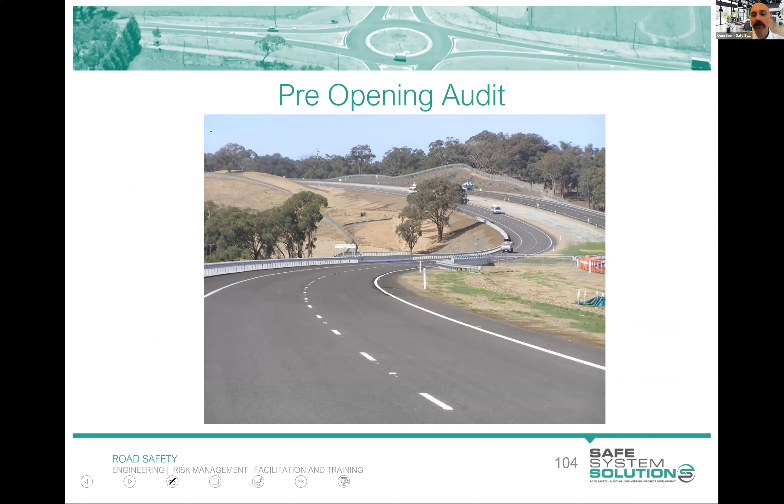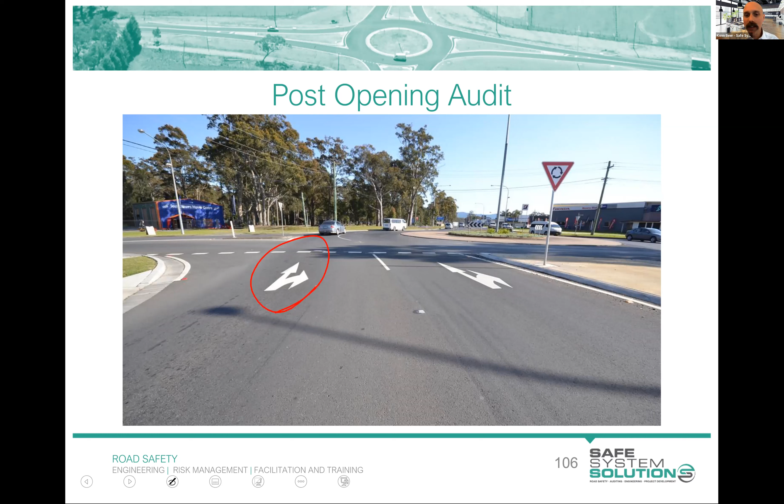There's an example of one that didn't get a pre-opening audit, and they've put in the stencil the wrong way—a vehicle going forward and a vehicle turning right. We're going to have a forced conflict. They're the kind of things we want to weed out.

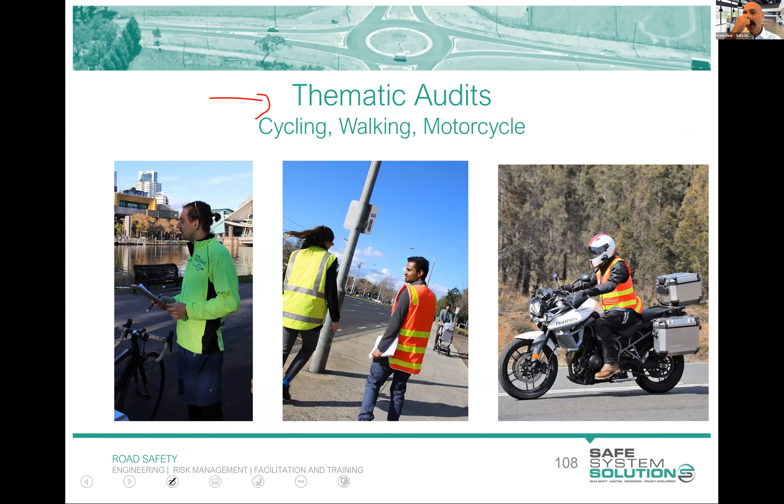An existing condition—so it's there, it's existing—what risks does it present? And the last thing are these thematic audits. They have a particular theme: cycling, walking, motorcycling. You actually need to have somebody in those shoes or in that saddle, and they undertake the audit as well as others, and you get that information. We'll talk about those more a little bit later on.

Okay, there's a question. Yeah, we've got a question: at what stage of the audit do you believe is the most valuable to the process, Ken?

I used to always say the earliest possible stage, as early as you sort of possibly can. I wouldn't say that anymore—the feasibility stage, because I would say that it's more valuable to do a safe system assessment at the feasibility stage of a project than a road safety audit. And if you have that proper process in and you do a safe system assessment early on, then at the next sort of iteration of design, concept, preliminary style design is a really wonderful time to do audit.

Because you can weed out some big issues. And then detailed design is a great time as well to get those absolute refinements. So that's the kind of process we like to see.

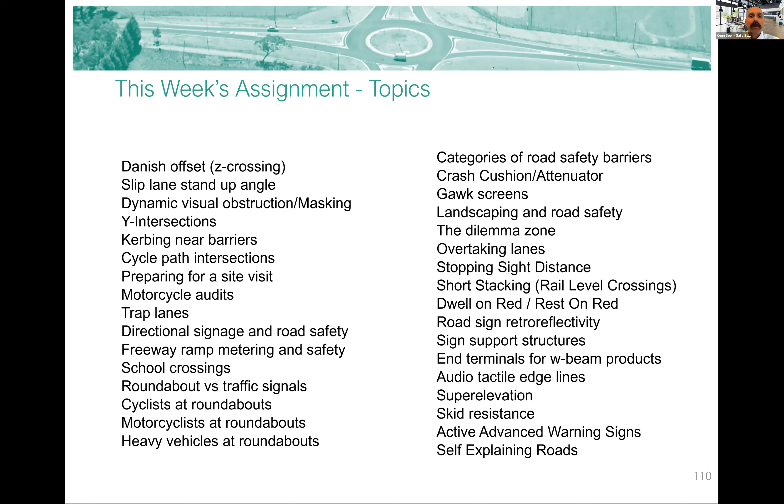Here we go, random topic generator. Feel free to insert your own generating music. I'm going to hit the button. Oh, it's not letting you do it. Here we go, let's go.

So good. Robert Scott slip lane stand-up angles, that's a good one, I love that topic. It's a beauty. So if you struggle to find information on it, get in contact with us.

As I say, don't spend many hours on this. Just get us something, be creative if you want. Get us some good little bits of info.